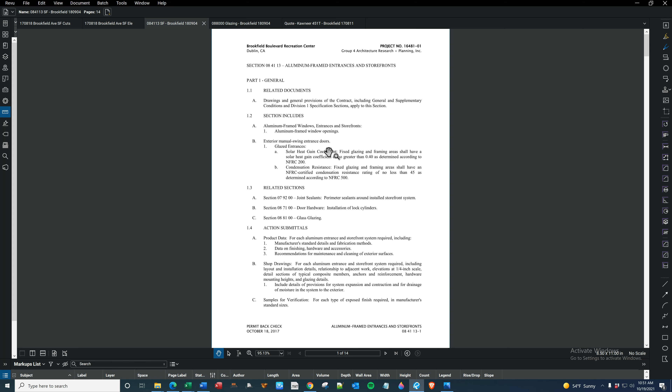So this is going to be, I have just about everything open. I'm just going to go and figure this as I'm doing it. This is a job that I got back in 2018. Warranty period of 20 years and 5 years, so that's just something you got to keep in mind.

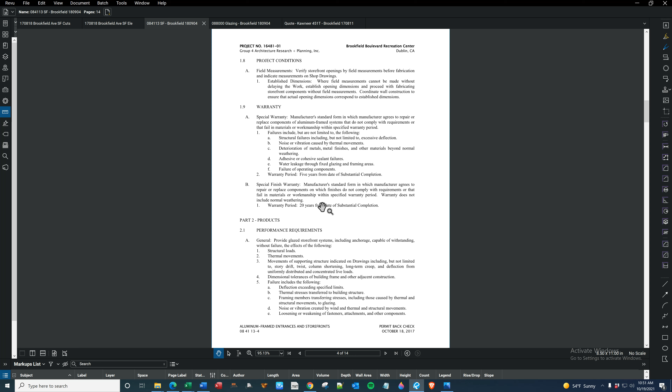Framing system 451T or accepted equivalent, thermally broken front set. All right, so that's basically all you need. I'm doing a general overview, I'm not digging too hard.

So I guess as of now, I'm going to do a 5-year with a 20-year. That'll be a 3-coat. Alternate.

The glazing, control 9, by the way, gets full, and then control to the right brings it over to the next page.

Alright, so a VLT of, alright, so this is in Solarban 70, so there it is, whatever. Okay, so these are my, where to start here. Okay, so I have to input these values.

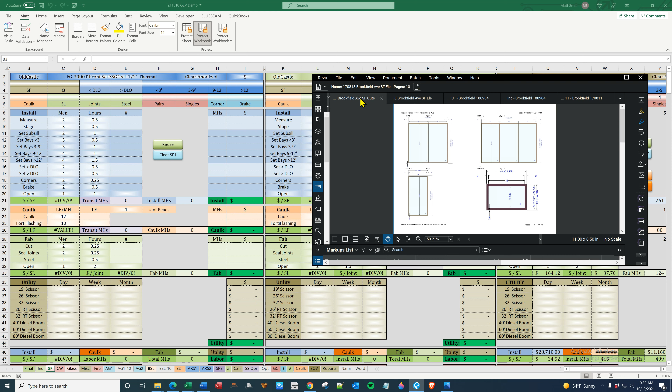So you start with SF cuts. Contact me if you want any direction on how to do it, but it's just a report. And you are going to be pulling these values here. 46 frames, 372 joints.

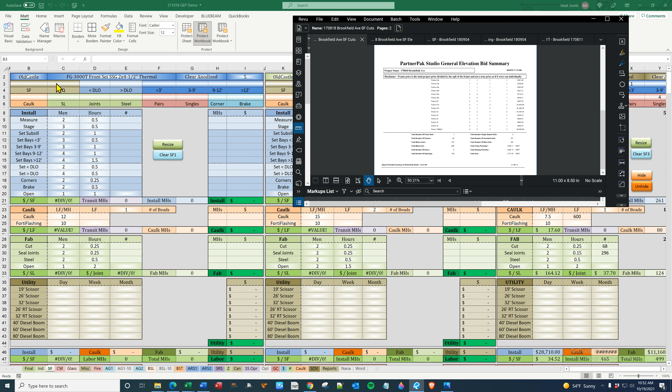So this is going to be a little slow here, but, and then control zoom in with the wheel is to do that. Frame perimeter 1497, which is here. Total area 3174.

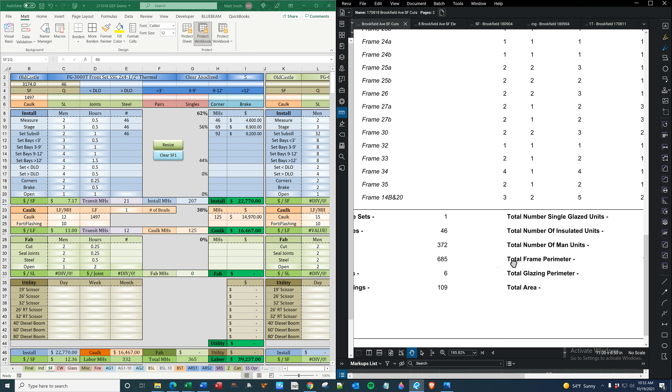All right, what else we got? Joints 372. And that's basically all you're getting from that, I believe. I'm going to keep it open for now.

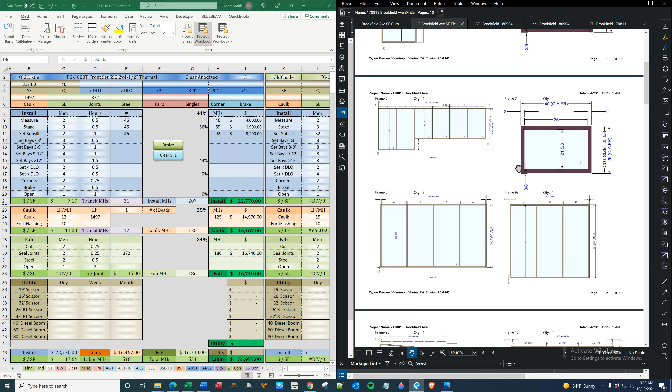Elevations is where you're going to do your counts, all right? So you want to get your pencil out and count your quantities. So that's 120, so that would go in 9 to 12, all right?

So you're going to be wanting to look for raked glass and verticals. Although I did do this where I made a, here's the other two in Excel. So these are all your stock lengths for which I sent out.

I send this out as a RFQ, so I did do it as a 3-coat custom. So I have 136 stock lengths, and then in this one over here I did make the glass type shape, so I can just pull 4 and put that where it needs to be.

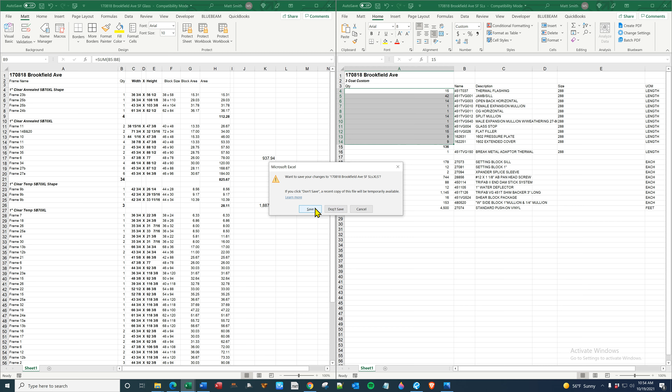So I'm going to plug this number in 136 and get rid of it and basically send it in for a RFQ. That's the idea. 136. Sorry, I gotta actually put my thinking cap on here.

I'm estimating people. Okay, so we're going to get the DLOs in a second, and we're going to go through here and check these out. So get your index card out.

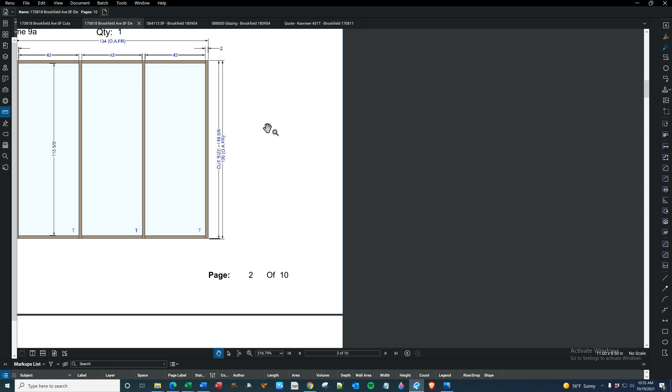And you're going to go 3 to 6. I'm just writing this on my index card, and 6 to 12 and 9. I forget what that is.

Less than 3, 3 to 9, 9 to 12, greater than, okay. 3 to 9, 9 to 12, and greater than 12. All right.

So, I mean, I really should just pause this, but you're just going in, figuring your quantity, and you're counting the number of bays. 96. So I got 2, I got 5, 6, and a less than 3 is 1.

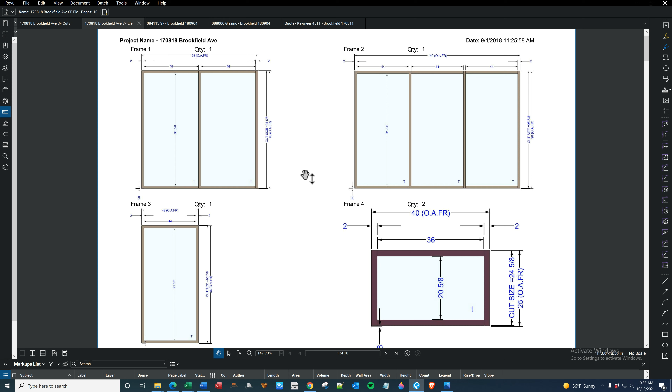So I'm just going to pause this and go through, well, maybe I'll just, these are pretty simple. So here's a rake. You might want to put a thing down for rake or call this a different makeup, which I did.

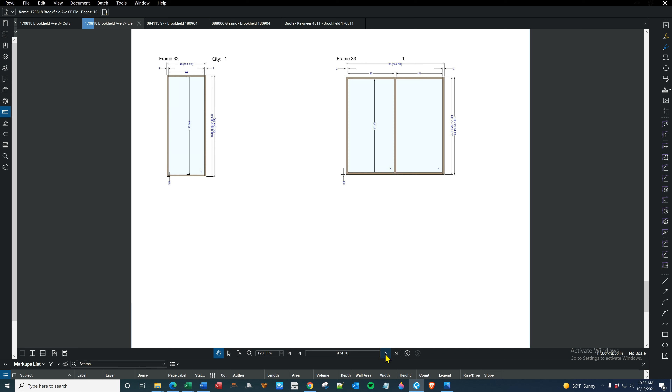So there they all are. I'm just going to go through these and count them, and I'll be right back.

Okay, I am back. So I want to make sure that you count from the door schedule and color everything really specifically. So for exterior pairs, here it is right here. This is my RFQ, I guess.

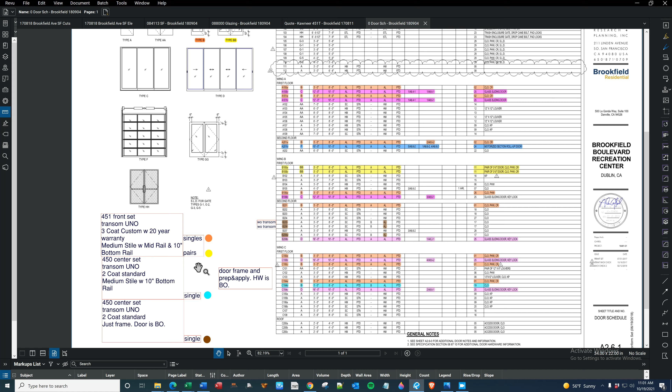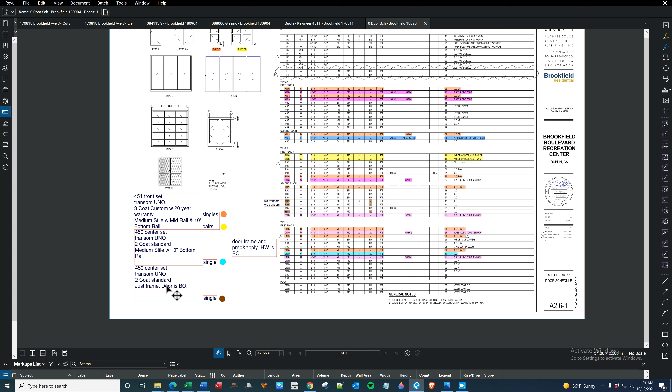So exterior pairs, I do yellow. Exterior singles, I do orange. And this would be an interior single. Anyway, so these are pink sliders. They're Fleetwoods, rather expensive.

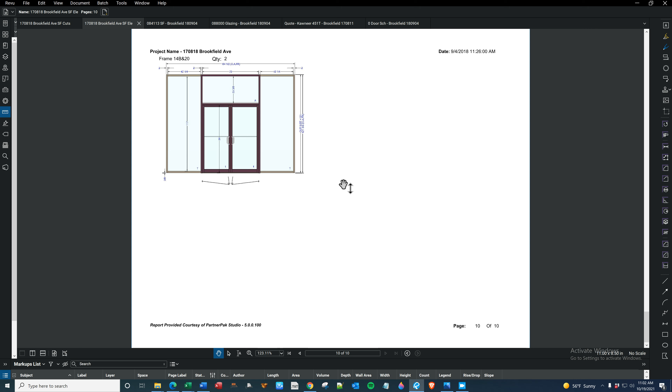So I guess what I'm saying is count your doors from the door schedule as opposed to your report here, simply because you may have a standalone door that you don't feel the need to put into PartnerPak, but just be aware of that.

Anyway, so I'm going to be taking my numbers here. Less than 3 is 4. 3 to 9 is 35, 45, and 6. Obviously, you can change these however you'd like. Change this however you like and make this whatever you want.

So this is showing that you have a total of 90 verticals. And 78% is, well, we haven't figured everything out. Anyway, so there's that. Let's get into glass right quick.

All right, so you're putting in the number of DLOs, which I've highlighted here.

So this is going to be for the doors, okay? So we're going to do 63, 97, 98, 99, 100, 101. I may have miscounted that, but so here we're going to go 101.

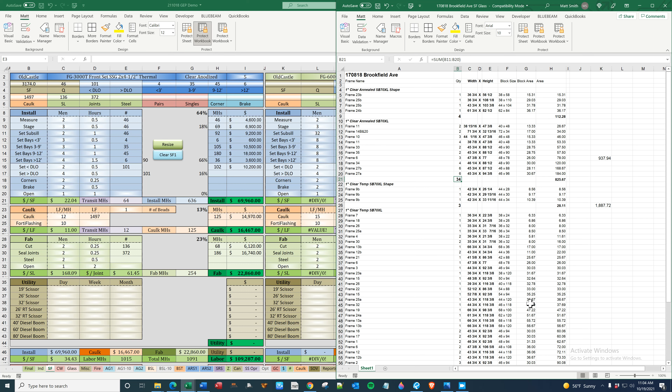I'll just go 9. So I'm going to go 9 here. And we'll go 92. So there's your total of 101.

And you're basically there. If you have steel, throw them in. Maybe you have 3 pieces. Pairs, single, corner, and brake.

Obviously, you're going to want to look at the architecturals and the details and figure if you want to put brake metal. I know that this job, I remember doing it, there was a lot of brake metal, so I'll just put in 16 pieces.

Pairs and singles. Let me just get through this. So I'll just go 4 pairs and 2 singles just to plug it in. So you want to adjust this accordingly.

Here's your price per square foot. It looks a little low, to be honest.

This is where you can maybe look at this nicely to figure your distribution of man hours. Brake, maybe we'll just put it at 1. And we can come back to it.

You're also looking at the total price per square foot. And that's obviously depending on your values here. Let me just make these all 100 so I can kind of balance myself.

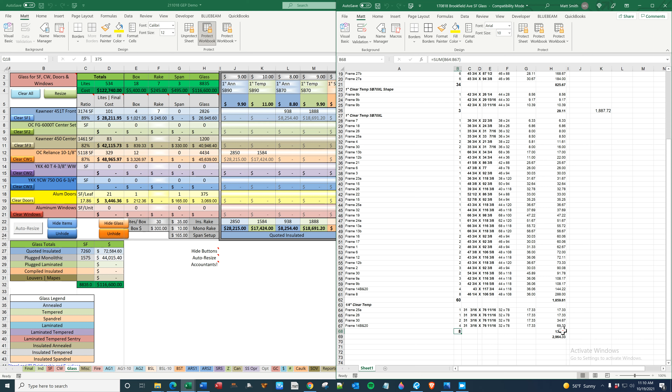Now we should adjust here. This is the number of leaves. Now it's getting weird here, so let's just clear. Anyway, this should be at around, what was it before?

So this number right here is telling you the average square foot to glaze a door. So that's low right now, it should be around 18, I believe, around there. But this is taking into account the other doors that are plugged in, and I don't want to go and just get rid of them. But that is where you would put your 1/4 inch clear tempered.

Certainly if it was on spandrel, so we'll change it to clear tempered. We'll just do low iron for the hell of it. Now, if it's Solarban 70, you can bring it over here, if it's an insulated unit.

So this number is being carried over to doors. This number is being carried over to storefront. 28,211, there it is.

And what I do typically is I will send out this as my RFQ should I feel the need to get it. Well, let me just get the actual quotes that I have here. That'll be fun, give me a second.

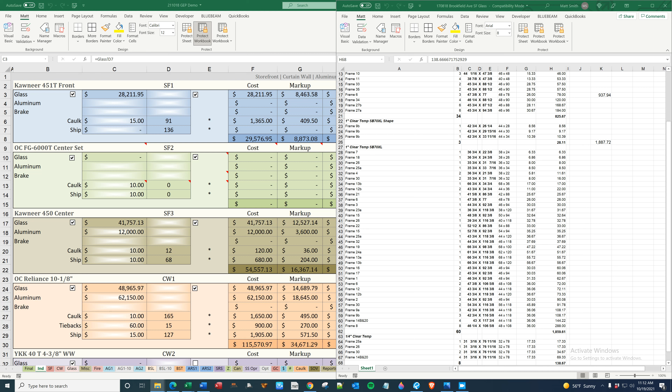And I believe I had the Collier quote already up. Boy, this is fun, digging into work jobs that I did in 2018. Whatever, I don't know what's going on there.

So this is Pacifica. I don't want to waste your time looking at this stuff, but basically you're just pulling this price per square foot and you're applying it, having already put in the square footage.

So down here we have ins. rake, we're going 40 each, so then that just adjusts this number here. And we're going to go Solarban Pacifica, and whatever it was, 12, whatever it was.

I'm just making these. I don't want to waste so much time.

So we have your glass here. Generally, you'll want to do that. You're going to want to use this as your place to put in your quoted material, like I just did. You then have drop downs over here for something like 1/4 inch low iron.

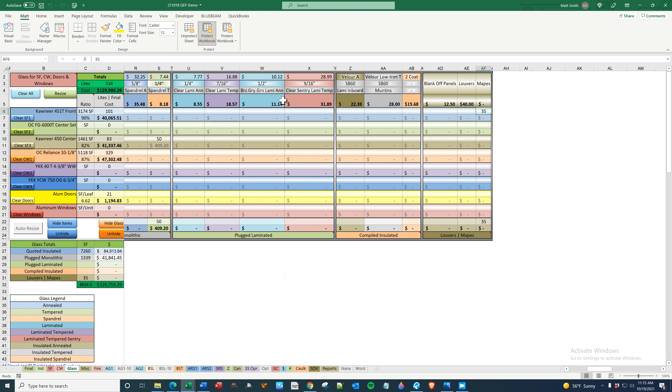Once again, just to reiterate, the idea of plugging this square footage in is important, and you can put 0 there, wherein the 35 will carry, but the price will be applied here. So you'll find fun little ways that you want to do it. And there's your Mapes, you know.

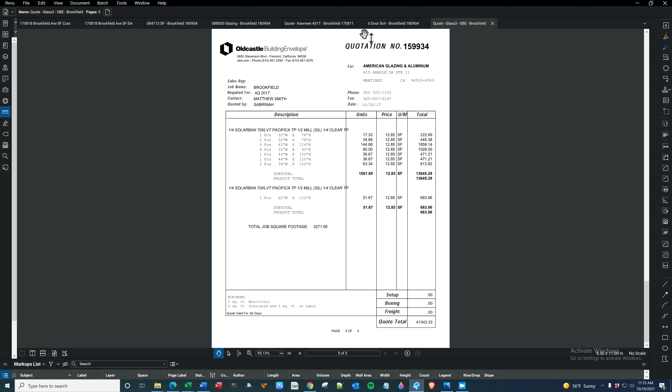So what I'll do is say 24,500, and then I will plug in a number here. Collier will go, anyway, I'm putting the total here, and I'm just putting in a plug number and distributing it to here. I'll say 4,000. And I'm going to say this equals the total minus this minus that. Just typical Excel stuff. Then you can maybe put, you know, that's your total Collier.

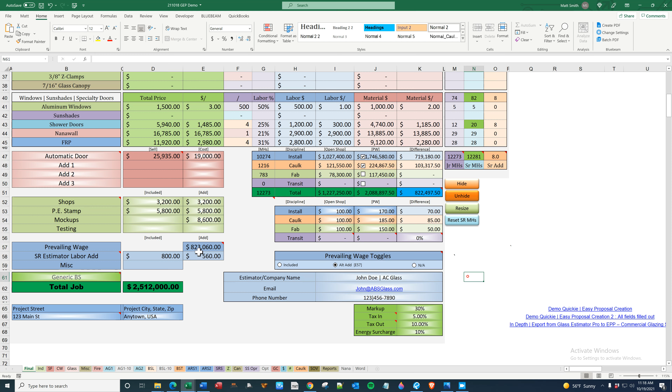So at the end, when you're trying to figure what you're doing here, you're looking at your labor percentage, which is good. You want a little more labor than material nowadays. Price per labor is what I concentrate on. Material is just, it is what it is, I don't really concern myself with that. Total price per square foot is another thing I concern myself with, but do not shoot from the hip and say $75 per square foot. That's a silly way to do it. Concentrate on labor.

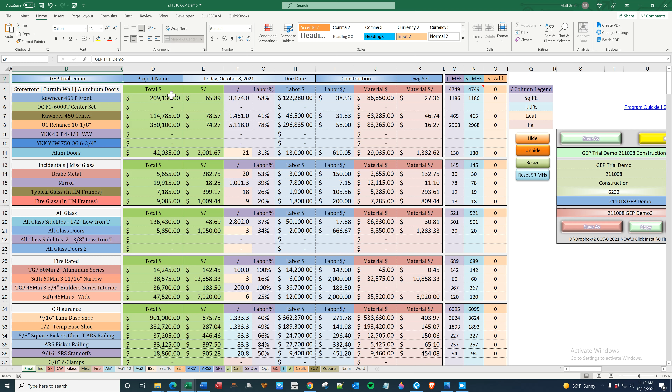So that is how you input values into Storefront and Curtain Wall. I hope this was informative, and if you need help just in general estimating, I am here to help because I'm rather good at it. Thank you very much.